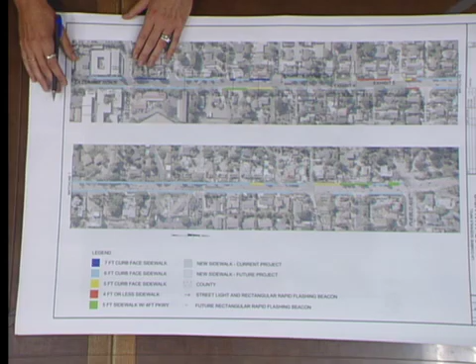So since that time, we've started conceptual design and had this corridor studied. The big picture is to infill all the remaining sidewalk so we have continuous sidewalk from State Street to Foothill on La Cumbre Road, and hopefully to receive other grant opportunities for the rest of the sections.

This is a safe routes to school corridor; this stretch of road feeds into 4 schools. Off of La Cumbre, along La Colina, is Hope Elementary School. A little further down is a private school, Bishop Diego. There's also La Colina Junior High, accessed off of Foothill, but with a lot of neighborhood connections from La Cumbre Road. And on Hope Avenue is Monte Vista Elementary, though some students would use La Cumbre Road as a passage. So this is a very high priority corridor for sidewalk, and with the school safety assessments we've had with those schools, that's why it's risen to the top of our sidewalk infill priority list.

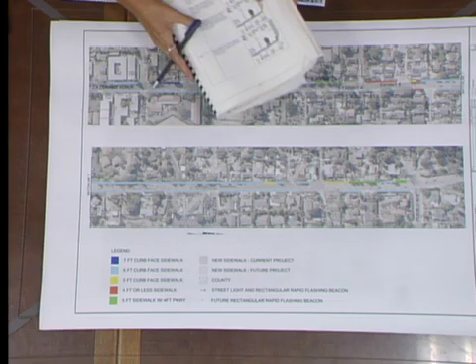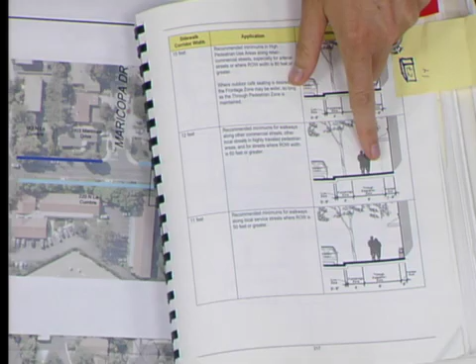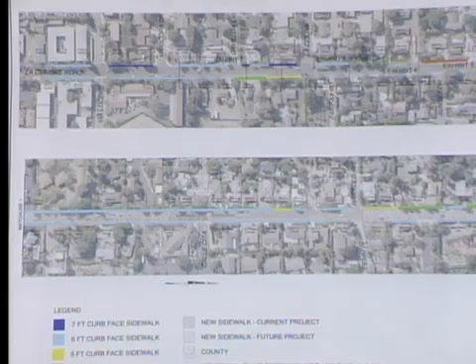So what does the pedestrian master plan say? This is a 60-foot right-of-way. What's recommended is essentially a 4-foot furnishing zone, which is the planter area, and then a 6-foot sidewalk. As far as what we have in that 60 feet right now, we have 12-foot travel lanes and then 8 feet of parking on both sides. So essentially what's left over on both sides of the street, we're working with 10 feet.

With that, I will hand it off to Eric, and then we'll go through the options that we are contemplating as we move forward with design.

In the locations where we have any existing parkway, because there's only 10 feet of right-of-way, we only have 5-foot strips of sidewalk, which is the minimum. Any new improvements, if we go with the city standard, there are a number of conflicts along the corridor. That's why we're recommending going with a 6-foot curb face sidewalk to match the existing conditions and avoid a large number of those conflicts all along the corridor.

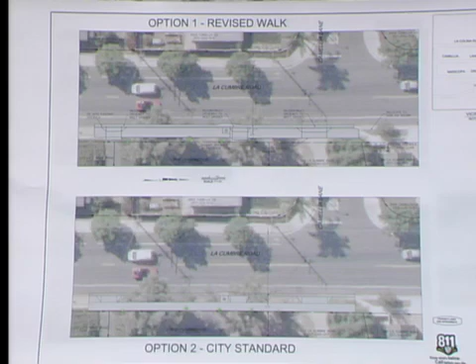If we go to Exhibit 1, this is between Maricopa Drive and Kamea Lane on the east side of the road. If we put the city standard in, we'll get a 4-foot parkway with 5 feet of sidewalk. There are 5 oak trees along that length on the east side of the road that would conflict with the sidewalk and would have to be removed.

We don't want to do that, so we'd like to go with a 6-foot curb face sidewalk, which would preserve all of the trees and reduce the cost for the area. It would also match the existing sidewalk on the south end and tie into the existing sidewalk on the north end that goes from a 6-foot sidewalk into a 5-foot walk with 4 feet of parkway.

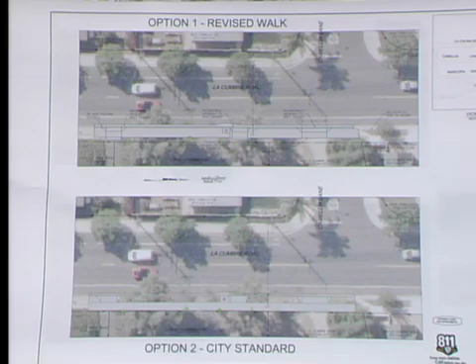In Exhibit 2, we are looking at the intersection at La Colina Road going north. At this intersection, there's an existing ADA-compliant ramp on the northwest side of the intersection. We're looking at installing a new ramp on the east side where there currently is no sidewalk. In addition to the ramp, we're looking at putting in rapid flashing beacons on either side of the intersection.

On the east side, we're going to attach the rapid flashing beacons to a street light to improve the safety in there. Would you please point and touch what you're talking about?

Yes, so the rapid flashing beacons are these, and the street light is on the east side, right next to the ramp.

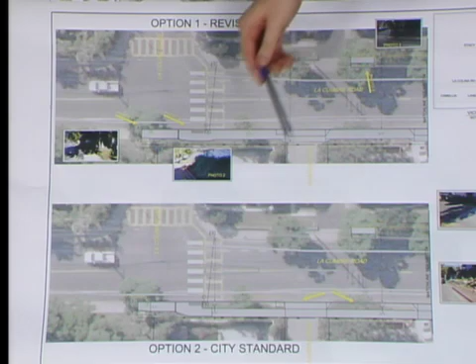As you can see in option 2, we have the city standard sidewalk shown. The positive about doing city standard in this section is we preserve one street tree. The negative is that it's a very steep area between the back of right-of-way and the front of curb, about a 3-foot drop. So if we put the sidewalk as far back as we can to meet the city standard, we're going to need about a 3-foot retaining wall, which is very undesirable and doesn't create a very inviting corridor for people to walk through.

So if we go with the 6-foot walk, we possibly might need some back curb or small retaining walls, no more than a foot in height.

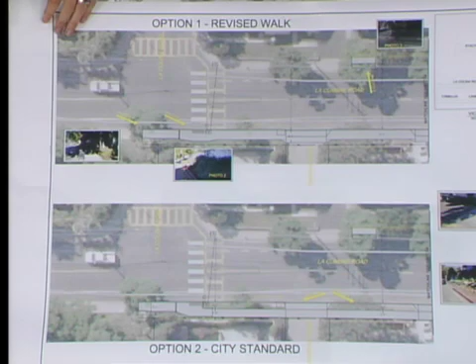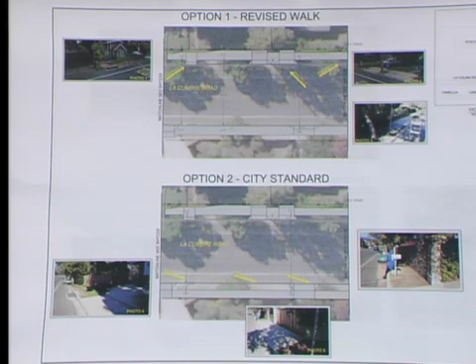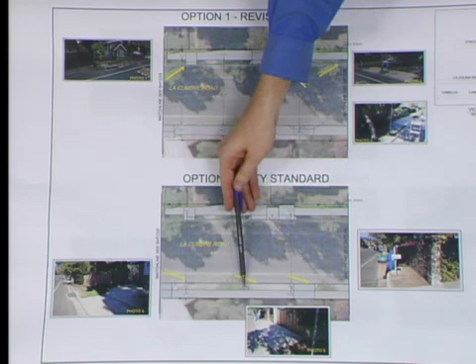If we go up the street to Exhibit 3, this is just north of the previous section. On the plan, it's much flatter of an area, but the conflicts in this section are a fence, which you can see the city standard walk conflicts with that fence. The fence is about 8 feet from the curb, so it would have to be moved.

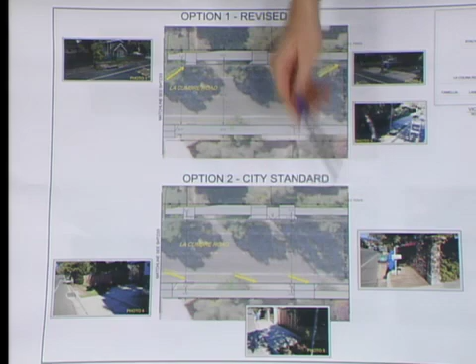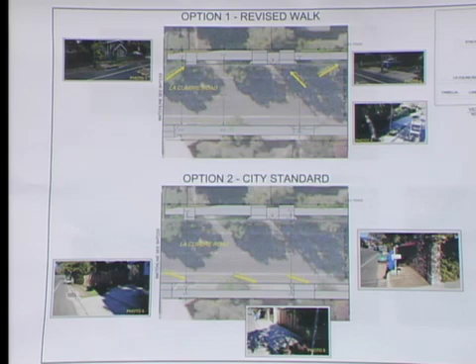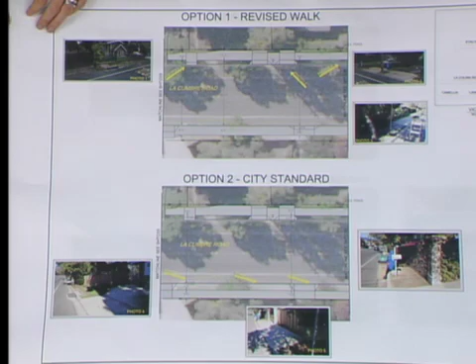There's also a wall next to a driveway up the street, and the face of the wall is 6 feet back from the back of the curb. So if we went with the city standard, both of those would have to move. If we go with a 6-foot walk, both of those are not obstructions to the project and don't have any relocation required.

And if we go up the street to Exhibit 4, this is just up the street, and this wall here is the continuation of the wall on the other sheet. Right across the driveway, there's another wall, and it's at the same distance back from the walk as the previous wall. So again, if we put in the city standard sidewalk, both of those walls are conflicting and would have to be moved. With the 6-foot walk, again, we don't have any conflict with those walls.

At this location, there's also a tree that has some shrubs around it. If we put in the city standard of the 4-foot parkway and 5-foot walk, that tree ends up being somewhere in the middle of the walk and has to be removed. If we put in the 6-foot walk, that tree can actually be preserved.

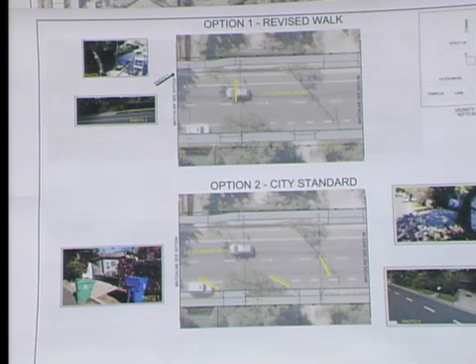There's a fence just up the street, which is shown in yellow here. With either option, either the city standard or a 6-foot walk, it's slightly conflicting, but it's only about a foot. It would only have to move about a foot to be behind the walk if we go with a 6-foot sidewalk.

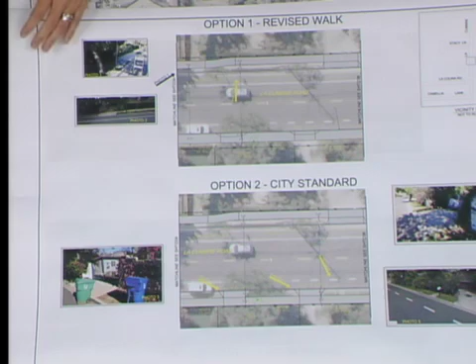And then we'll go to Exhibit 5. Starting at the bottom, at the south end of the street, if we stick with the city standard and go up the street, there are very few conflicts. There's a resident's tree that would have to be relocated. But this is also a very steep area.

In this area, the embankment slopes away from the road. So we would have to build up a retaining wall beneath the sidewalk at the back of the walk, probably about 2 feet of retaining wall. If we go with a 6-foot walk, we may have to do a little bit of grading to bring that area up to grade, but it will require a significantly smaller wall, if a wall at all.

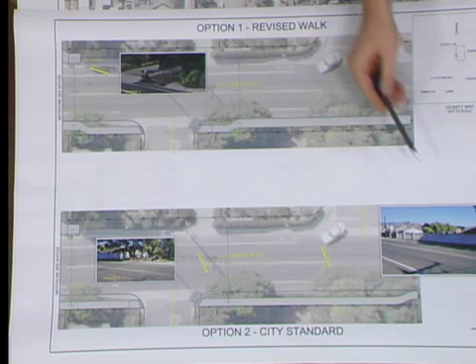Further up the street, right across Sunset, there was a newly constructed masonry wall, which you can see in photo 3. It runs about 118 feet along the property, and it is 4.5 feet from the back of curb to the wall, which either option we go with, it's going to be a conflict. We can't fit our standard sidewalk section, our minimum of 5 feet, next to the wall.

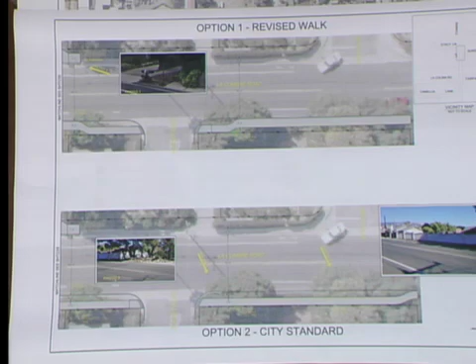In this case, we would still recommend going with a 6-foot curved face sidewalk because, again, behind the wall, there's a significant downslope, and we would have to raise it up and fill that whole area in. And that's the extent of the project.

Is that the end of the report? Pretty much. Yes, this—

Just in short, this isn't an easy sidewalk project. Most of the remaining sidewalk infill pieces have remained unfilled because they have issues, and this one clearly has topography issues and trees and all of that, and it's just trying to—

We still want to proceed with the goal of having a sidewalk. How that looks compared with the pedestrian master plan vision may differ in this particular case, and this is a little bit more unique, which is why we're bringing it for your feedback tonight. So, like I said, staff is leaning towards more the option 1 options, but we want to hear your feedback tonight.

Okay. Anybody? Madam Chair, yep. I'll start off. I've got basically a 3-part question.

First of all, Jessica and Eric, can you clarify for me again, the city standard includes parkway, or I'm not sure what the city standard is? The city standard is a 4-foot parkway and 6-foot wide sidewalk. Okay. And then, so that's option 2 that you're talking about in your exhibits?

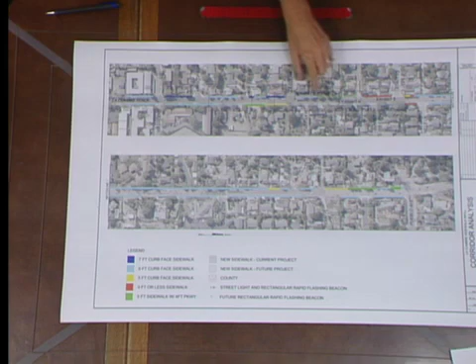So the solid color lines on the map represent existing sidewalk, and the hatched lines represent the areas slated for infill. Okay, I get it now, thank you. Okay, well, we do have a public comment slip, so let's go ahead and do that.

Ms. Miles? My name is Jody Miles. I live at 381 North La Cumbre, and we have mail delivery, and the truck just stops out in front. I'm wondering, since we've been responsible for our own mailboxes, and sometimes they're in great shape, sometimes they're not, how will this affect that—both the mail delivery and the location of the mailboxes?

We'll ask staff to respond to that question, I guess. Do we have any other public comment? Right, I guess I'll close public comment and bring it back to the committee. Do you have a response to the mailbox question? We do have a general response that we need to work that detail out as we move forward in design.

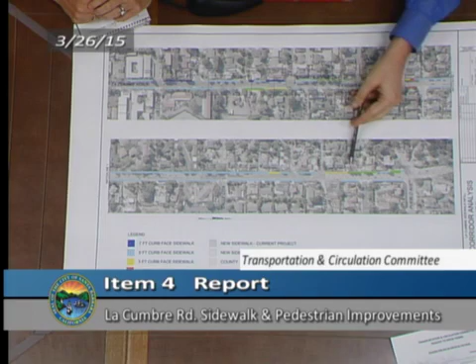On the west side, north, the only sections that have any existing parkway are on the north end between Harold Avenue and Pueblo Avenue. And the combined length of those is around 150 feet.

So we're talking about a fairly small percentage. Yes, and the overall distance and footage of sidewalk on both sides, we're talking about a relatively small portion that is actual parkway. So the infill and the transitioning that Cynthia was talking about sounds like it won't be a major challenge. Correct. Is that what I'm hearing? Yes, it will be very minor. Okay.

Okay, are there any other questions or comments from the committee? And if not, do we have a motion? I move to accept staff's recommendation. I'll second. Okay, got moved and seconded. All in favor, say aye. Aye. Aye. Any opposed? None? All right, thank you very much. Thank you both.

Now we will move on to discussing the bicycle master plan update. Peter Brown will present this to the committee.

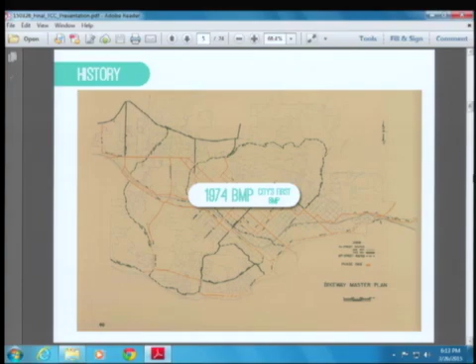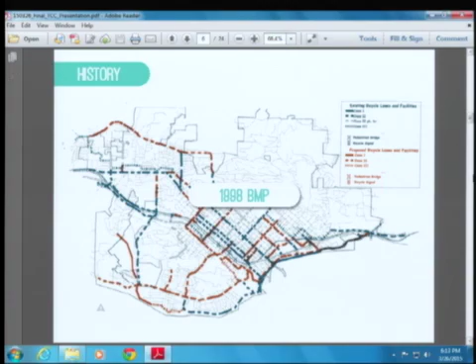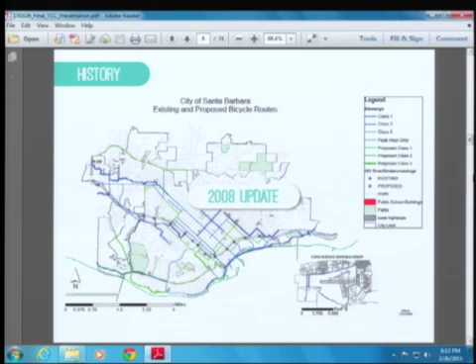It's a phenomenal plan, and we still have it accessible if you'd like to take a look at it. The 1998 plan, I do believe Mr. Dayton had a key role in as a project manager for that plan. That also was an award-winning plan, and it's the basis for a lot of the infrastructure you see now on the ground. In 2003 and in 2008, in order to meet state requirements for funding, we did basically what amounted to readoptions of the 98 plan, and those were fine in terms of keeping our eligibility going.

Now in 2015, a good 17 years later, we're doing a wholesale look at the network again. Our current facility map shows the network as it is, and this is also available on our website. This will be a good reference piece for the Bicycle Master Plan engagement with the public.

Some of the recent things we've done: we've increased our bike parking capacity, we've done our targeted enforcement efforts, and those are ongoing. We'll do another one in April. And we do have some nice Class 3 and crosstown projects that have come up in the last 5 to 10 years.

The East Side Neighborhood Transportation Management Plan is a plan that is guiding some of our outreach effort in that community. That's a related plan, you just heard about it in the last item related to the Pedestrian Master Plan. Education and enforcement, engineering, is another one of the 3 E's. Those are going to be key parts of how this plan is successful, along with our ATP projects and our corrals and parking.

We have a silver designation from the League of American Bicyclists, and one of the questions we're asking is, what's next? What's in the future? What do the residents of Santa Barbara really want to achieve? This gets at some of those questions. Should we be improving existing facilities? The 8 to 80 city for multimodal activity is kind of a national new moniker that speaks to, regardless of your age, whether you're an 8-year-old child or an 80-year-old grandfather, we want the city to be a comfortable place for you to move about in, and perhaps not be dependent upon an automobile if you choose not to be.

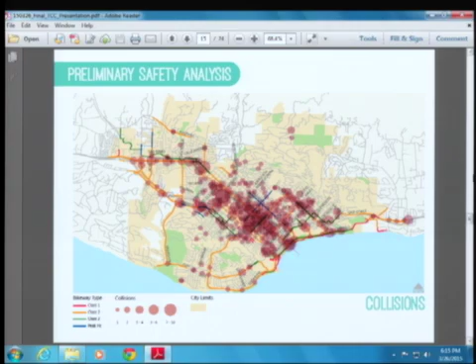We've done a pretty extensive safety analysis. We have a high level of collisions, but one reason for that is our high level of activity. We have a very active street network, and that's part of why you can see that spine along State Street. Modoc is also a common way to get across town, and there's a concentration around Carrillo as well. So we know where the accidents are occurring, we know what type of accidents are occurring, and we're looking to address those through the plan.

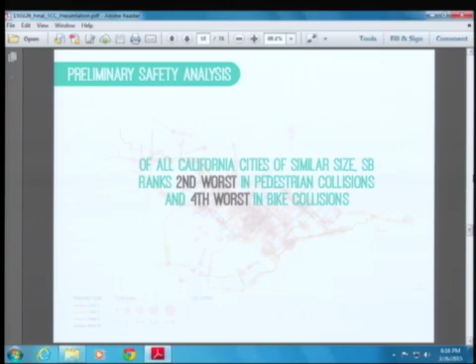Some of the less than favorable statistics: the Office of Traffic Safety ranks us, for cities between 60 and 100,000 in the state of California, second worst in the number of pedestrian collisions and fourth in bicycling. So we know we have issues to address, and safety is one of those things we can all probably get behind as a reason to move forward.

The stakeholder roadshows, I talked about that last month. I'll be sending out an invitation to all interested organizations, as we discussed as a team. We're going to do that as soon as the council sees this on April 7th. After that, once the council has provided their input, we're going to launch the stakeholder roadshows. The neighborhood summits: East Side, West Side, Mesa, Uptown, Downtown. I'll give you the schedule and details for those.